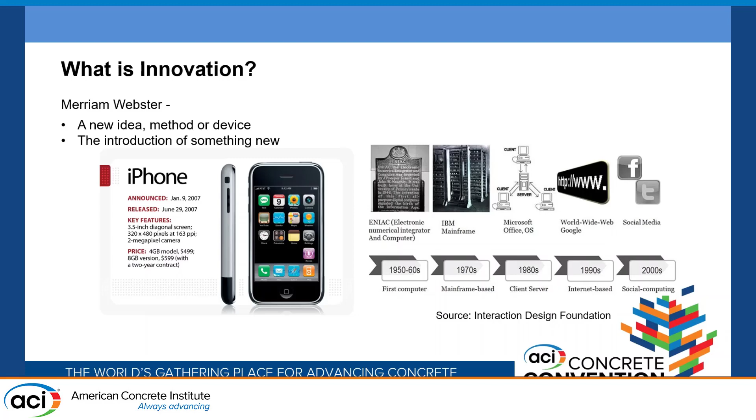We have these little block devices where you can do commercial business immediately, nothing related to iPhones. On the sustainable side, you have reusable bags that were developed to meet the need of changing from a plastic bag to something more sustainable.

Getting back a little into the devices, even myself, I have a smart pen that we use to write and become more sustainable instead of using a lot of paper. We use these electronic devices.

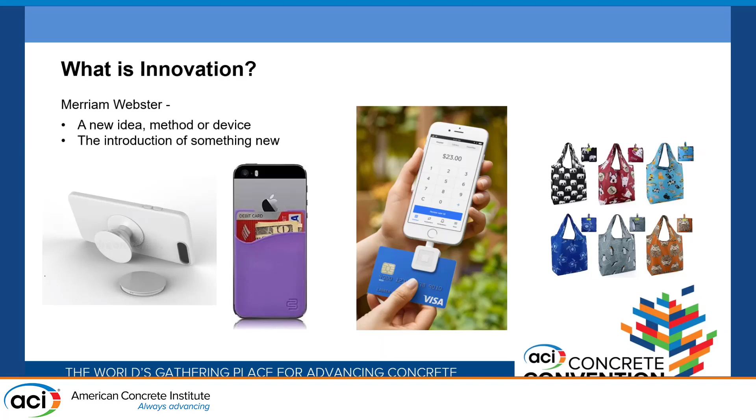However, in construction, the adaptation or acceptance of innovation is not as quick as we see in other areas. I'm showing here...

...the trajectory of the admixtures. In 1960, we saw the first superplasticizer that was developed. Then in the 80s, we saw the polycarboxylate coming to revolutionize the admixture area. We saw those used in Japan, as you see in the example over there. And then later in the 90s as well, we saw the first self-consolidating concretes being developed. So it takes a long time.

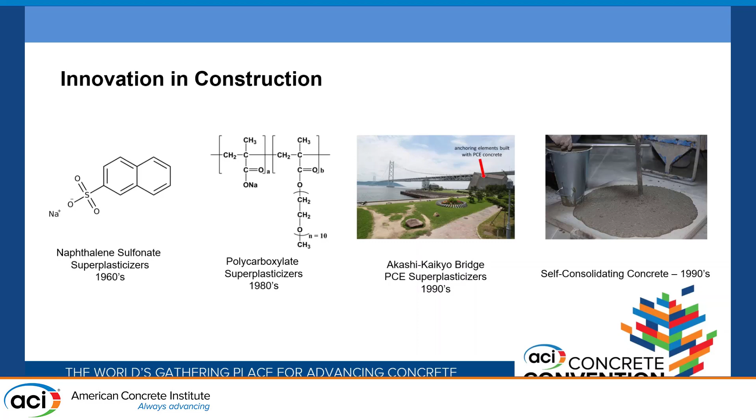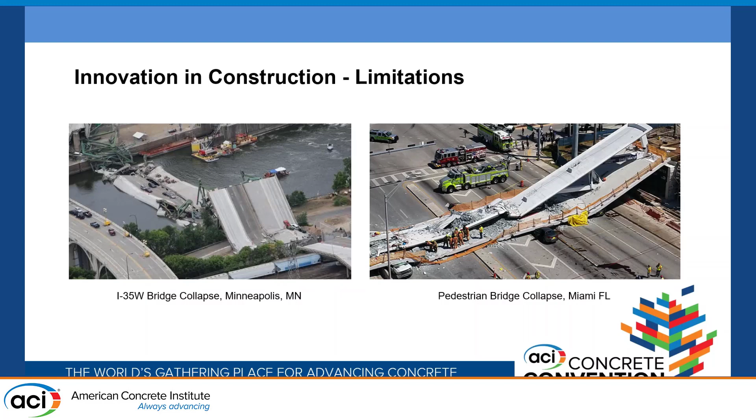Our industry takes a lot of time to accept new products, new innovations, something new. But there's a reason behind it. There's some limitations. We need to recognize that there have been some catastrophic situations that made us think, or be apprehensive of accepting something that is new.

The reason why is because if something is new, then there's no reference. People and engineers in our industry look for references. Nobody wants to be the guinea pig, nobody wants to be the first one to try. But at the same time, if you're not the first person to try, then there's no history. So it's like the chicken and the egg kind of story. But that's how it is.

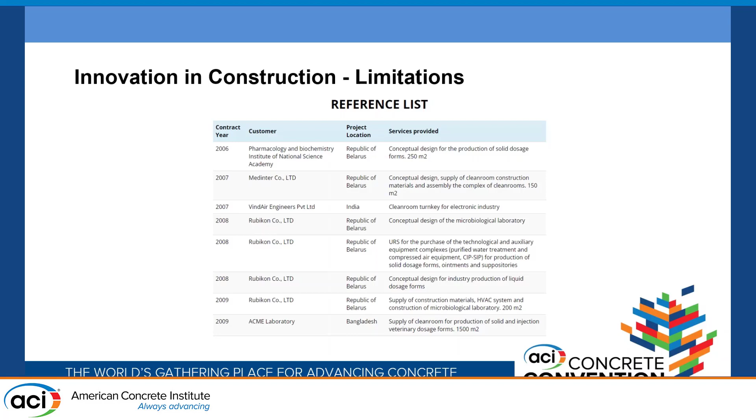And we have to continue to work on this situation and move the industry to a more innovative industry.

So in summary, the industry needs proven technology in order to move forward with something new. At the same time, these big organizations, such as the one I'm working with, also need the value proposition well defined, need to make sure that the return of investment is there, which brings limitation as well.

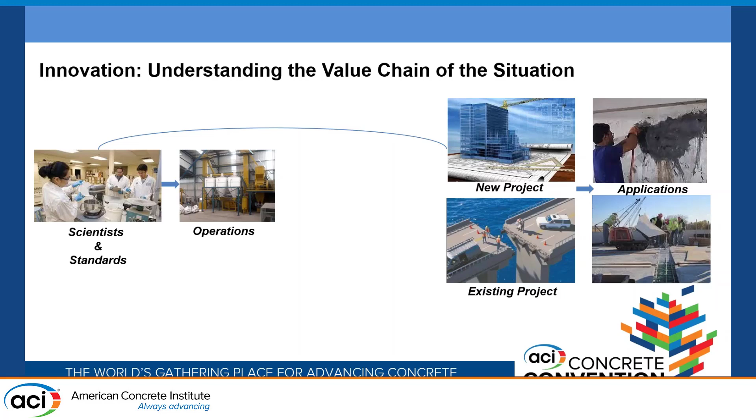Once we understand that, we also need to understand how the solution will be applied, right? That's important at the end of the day. When we do that, we come back to the lab. We met with experts, analyzed the standards, and decided what needs to be done in order to get into that specific solution. Then you need to make sure you can produce that new solution and supply it if it's something new. This is an iterative process that we follow in different cases, and we have to do that if we want to address certain topics or issues we face in the industry. We have to have an open dialogue with the different stakeholders to understand how we can bring new solutions into the market.

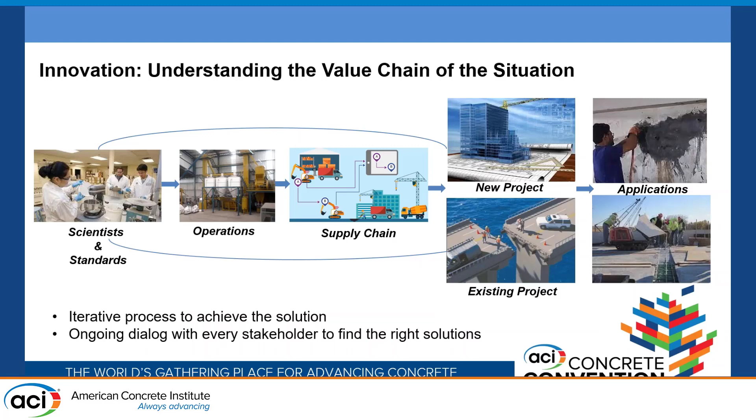This is my introduction to start talking about 3 specific projects that show this whole value chain out of the box, out of the specs of following a strict protocol, and being more flexible to find solutions in 3 different situations that we have here.

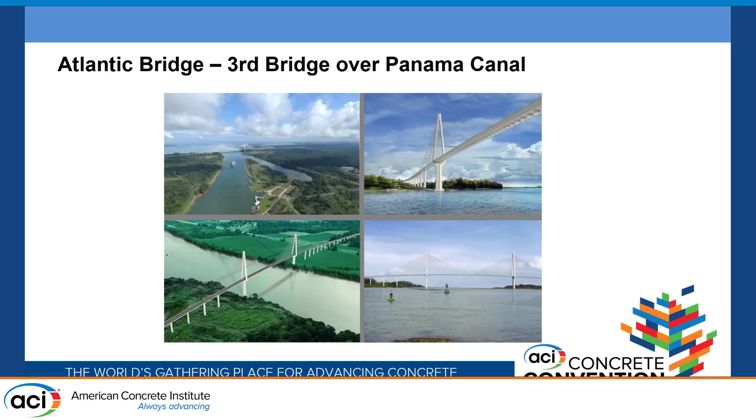The first 2 are going to be related to projects in Latin America. The first one is in Panama Canal. I'm going to talk about this gorgeous cable stay bridge that was awarded in 2012 in Panama to an international contractor. This bridge was almost $400 million of investment. It's the 3rd bridge over the Panama Canal. They're working on the 4th one right now.

The issue here is that this project was awarded to an international company that did a tender, understanding that they will not face any situation at the local level. They faced an issue with concrete. Workability was a big issue, and also the viscosity of concrete.

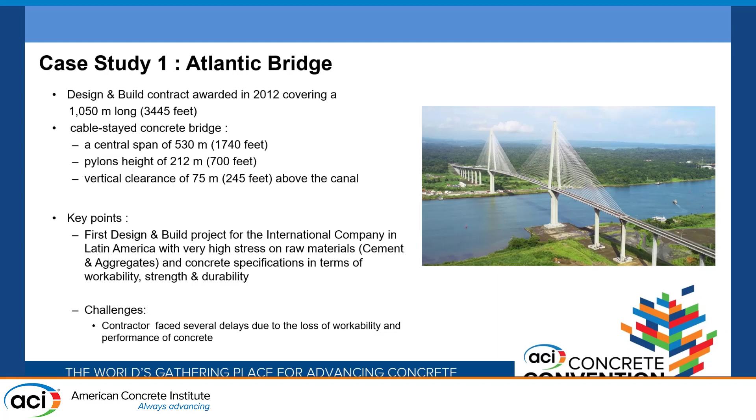These slides show a little bit of the history of what happened. In 2012, as I mentioned, the bridge was awarded to this design and build company, and they started working on the project. In Q4 2012, they started facing issues with the concrete. Guess what? They didn't know that the local materials were not meeting the standards, specifically because this is a European company that didn't have any experience in Panama before. So they struggled to pump the concrete, struggled to maintain the workability, and that's when they called us to be part of the equation and find a solution to overcome these challenges.

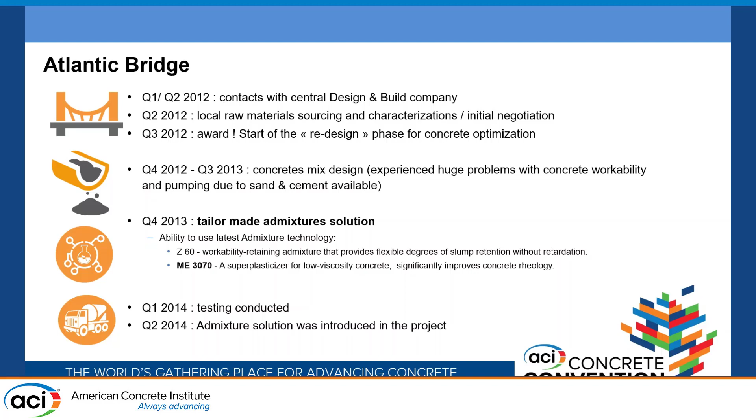The solution was developed, and I'll talk a little bit more about it, and introduced into the project at the end of 2013. So they really struggled with this situation.

Basically what happened is that everything started by the fact that the project required high durability. With that, the designer or the owner, which is the ACP, Autoridad del Canal de Panama, required that the RCPT numbers for the bridge meant all the concrete needed to meet below 1,000 coulombs. With that, a low water-to-cement ratio is needed, and in addition, the materials available were manufactured sand, very harsh sand, and they had to use supplementary cementitious materials such as silica fume, natural pozzolan, and others.

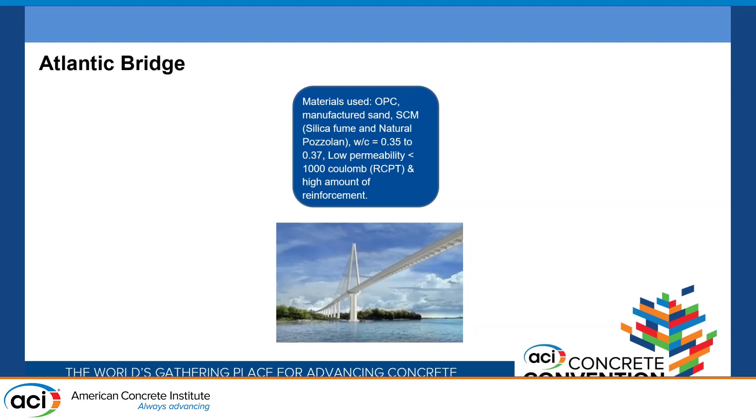So when the project started, they did not take into consideration the viscosity of concrete. They got the strength, they got the coulombs, they got what they needed, but guess what? They were having issues pumping the concrete.

They brought together several stakeholders to discuss what we can do. We need to address this. We were one of them. We came to the conclusion that we had to take a look at the viscosity. We took T50 as a test method for viscosity. Since we were on the project in Panama, nobody had a rheometer available, so in practice we used something that could be used on the project.

When the first reference design mix was measured, the viscosity in terms of time for T50 was 10 to 12 seconds. Among different stakeholders, the conclusion was that in order to mitigate this issue, we had to reduce the T50 to 7 seconds. So we worked on the mix design with the contractor, and we ultimately got a new solution that helped them decrease that viscosity and solve the problem.

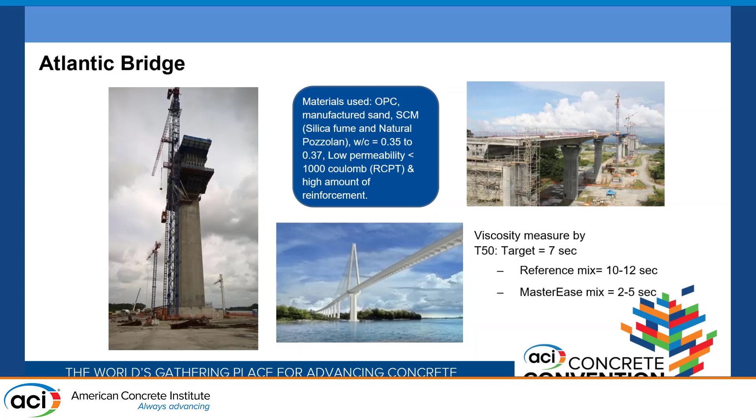The situation here is that, as I mentioned, when a design and build company, a multinational company, gets access to this type of project, they just follow what they used to follow in every generic big project. They look at the specifications, go to the tender, and once they get awarded, they work on the project. But they didn't realize they would face such issues with the concrete.

So what was key on this project was the fact that, at that time, we had a very structured project in Germany where we were developing a new molecule, but it was not ready to be launched. Fortunately, because we were working closely between US, Panama, and Europe, we decided we needed to do something. We needed to address this issue, and we carefully decided to take a risk and launch this product into Panama to see if it would help with the viscosity of the concrete and all the other requirements needed, and we succeeded.

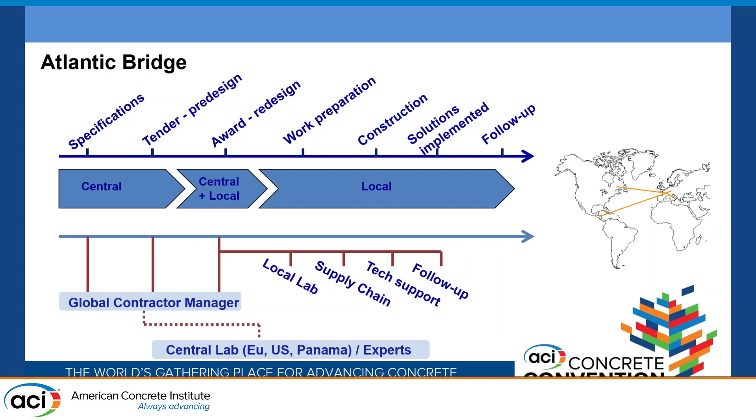It was a big push. We knew that we were not fully ready to do this, and there was a lot of logistics behind, but finally we were able to succeed.

And with these slides, I will close this case study to move to the next one. My message here is as follows: the key part to be successful in this particular project was that we look at the whole value chain. We look at what ACP, the Autoridad del Canal, wants, we look at what the contractor and engineers were facing, and we look also at the concrete. We addressed every single part of the whole value chain before we decided to take that new technology out and decrease the viscosity of concrete and solve this big issue.

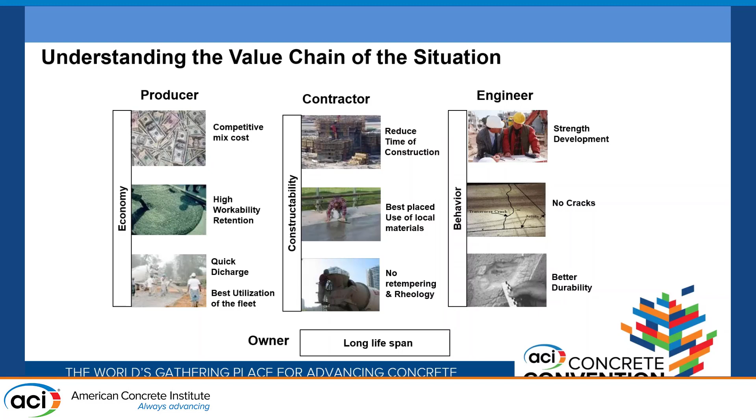Now I'm going to move to the second one. This is related to the underwater grouts, and I'm going to spend here more time than in the other one.

First of all, this is related to the rehabilitation of Ituango Dam. Ituango is the largest power station in Colombia, a 225 meter tall embankment dam. This project has 8 huge turbines to generate energy. The energy that this hydropower project generates is 17% of what Colombia needs in terms of energy.

So imagine that. The issue with this specific project is that they ran into delays that took them into the rainy season. As a background, in South America there's no 4 seasons like in the US or other parts of the world — there's 2 seasons, the dry season and the rainy season. So in this case, the project delay pushed them into the rainy season, and with that came the possibility of the project becoming completely compromised, because now you have more water than was considered during the schedule of the project.

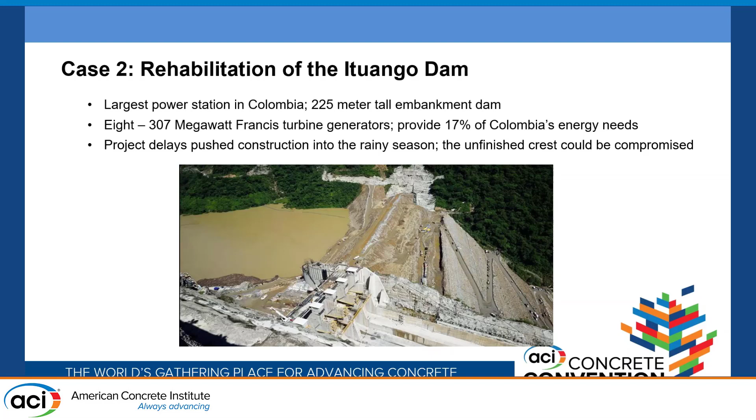So what happened here? We're in the rainy season. There was a high debris flow of water going through the main 3 diverting tunnels that, as in any dam, take the water out from the Cauca River to divert it from the river. Due to the rainy season being in the equation, one of the diverting tunnels was clogged with a lot of debris. If you look on the internet for this specific project, there was a lot of issues around it, but we're going to focus just on this one.

What happened is that with the diverting tunnel clogged, the water caused high pressure, and they had to wait a few days to decide what to do. They tried to unclog the tunnel. It didn't work. So they had to evacuate 9,000 people because of the situation. It was a whole crisis, because if they didn't solve this, more than 100,000 people would be affected.

So basically, under a lot of pressure, they had to divert the water through the unfinished powerhouse. You can imagine how big the loss of the turbines was — that's a different story, millions lost. This project was originally a $4 billion investment that ended up with additional cost. But they had to do it — they had to run the water through the powerhouse.

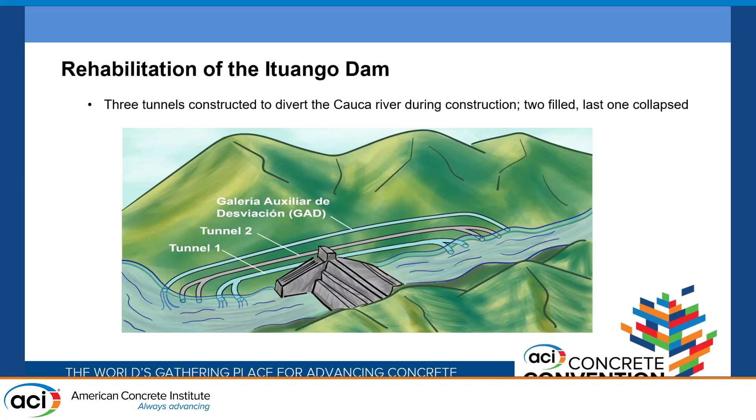They fixed that issue, fixed the pressure of the flowing water, and avoided any further catastrophe in the country. But at the end, they had to do something with the diverting tunnel. The designers and consultants met and decided they had to close one of the tunnels that collapsed and would no longer use it. This is a pictogram of how it looks.

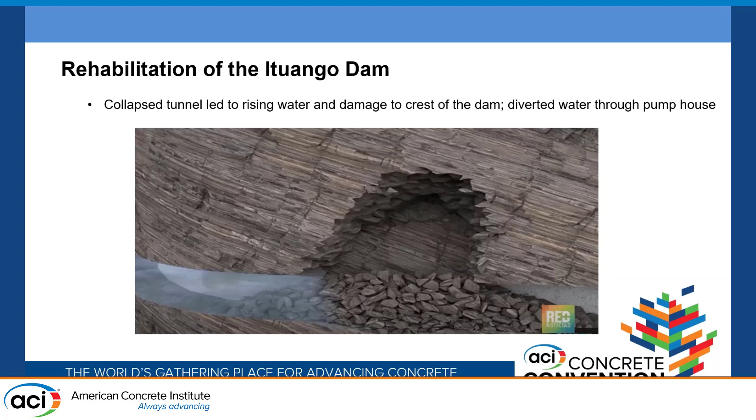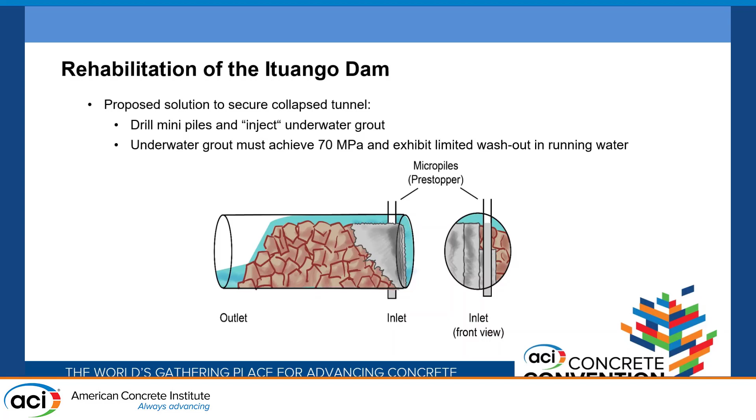The solution proposed was to create pre-stoppers in the tunnel and inject, generating some micropiles to inject underwater grout and also a resin material. You might think, why not do it with only resin? The issue is cost — when you have a cementitious material, it's more cost effective than filling everything with resin.

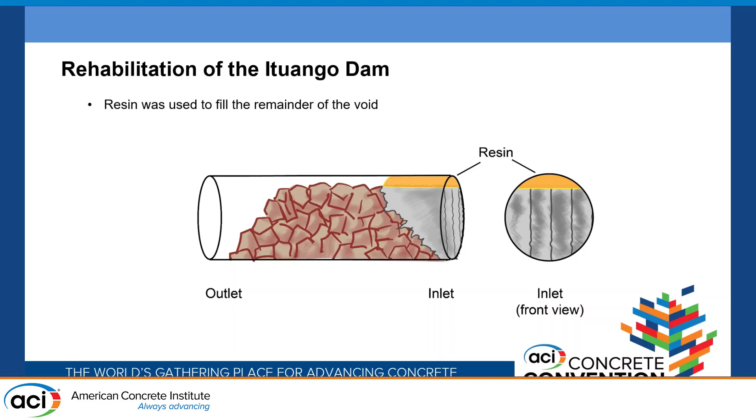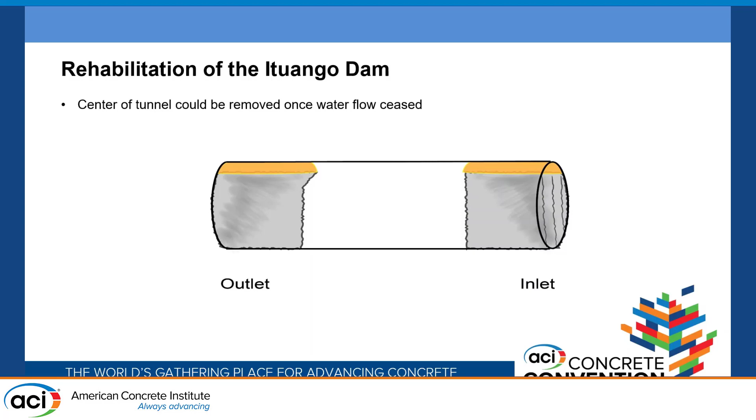These micropiles were injected, and this pictogram shows how the first pre-stopper was done, and at the end the resin was introduced to fill the remaining voids. Once the 2 pre-stoppers were done, they removed the excess material inside the tunnel, backfilled it, and closed it. They had to do this in order to stabilize the mountain, because there were also some issues with stabilization.

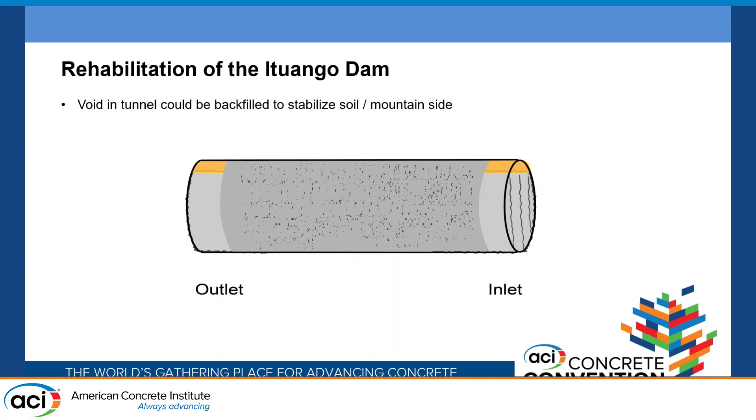So what did we do here? We had to quickly develop a new solution that was not in the market. We needed an underwater grout that was pumpable for more than 130 feet, with an open time of more than 1 hour. The strength requirements were clear: 48 megapascal at 28 and 56 days, as I showed before. In terms of anti-washout properties, they knew the tunnel already had water running, so the material had to withstand 340 liters per minute without losing more than 30% of the material.

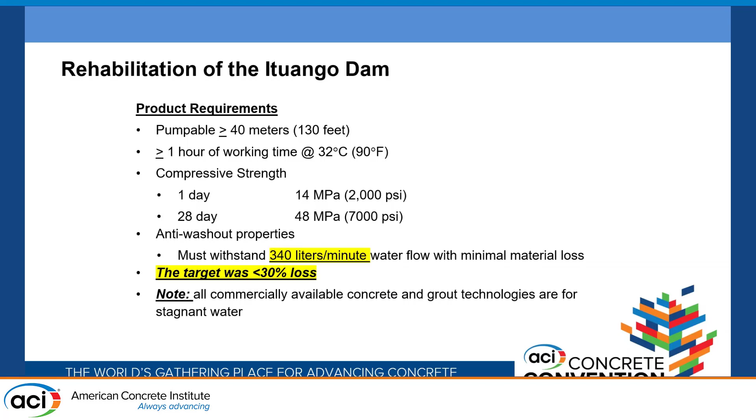So how do you prove that? We have several collaborations with the designer and the different stakeholders, the contractors, and so forth. And in order to simulate what was happening there, 130 feet away, we developed a fish tank as a mock-up. We did that in our facilities in the US, but also in Colombia.

So we were basically doing the iteration that I mentioned at the beginning. We did it three times in order to get to the right solution to incorporate this grout into solving this issue. What you see there is the fish tank that has an inlet and an outlet. At the outlet, we have a drum that collected the water that was exiting, and by measuring the density of the water, we evaluated how much material was lost.

It was not us only, it was a team of people. The designer was involved, the contractor, and several other consultants, and ourselves trying to figure out how to solve this situation. What you see in the middle is a picture of one of the prototypes that were conducted, and we basically saw that it looked good from the outside. It seemed that the product was injected correctly, but at the same time, we took several cores to analyze the consolidation of this material.

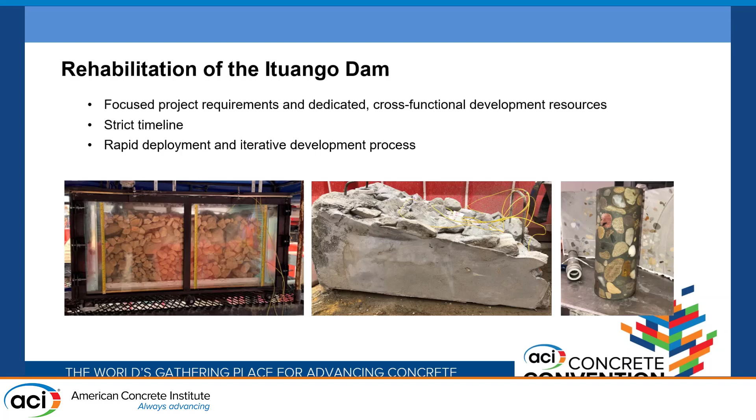So we ended up putting 1,200 metric tons of grout produced in the US and supplied to Colombia, stored in very controlled temperature containers in the middle of the jungle in Colombia at 90 plus degrees of temperature, and we were able to succeed on this. So it was obviously a lot of stress and a lot of people involved in creating this solution, but we were lucky. No, obviously we had a lot of success in doing this.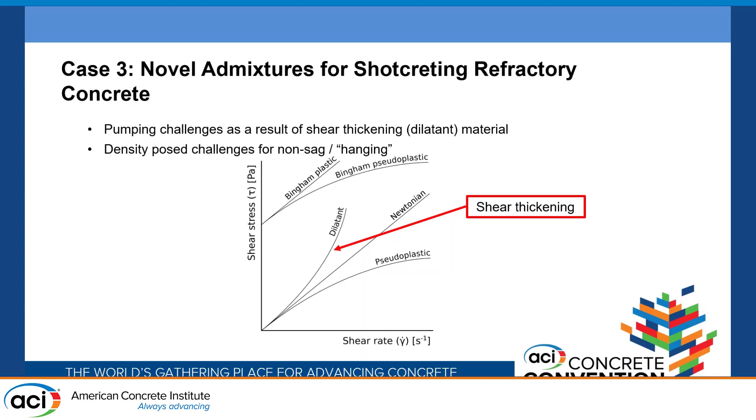The last case that I wanted to show is something that is not in Latin America. It was done basically in the US, maybe two or three decades ago. But we thought it was important to mention this as well. When refractories were something big, and shotcreting refractory concrete was something new, we didn't have the right solution available. We found out there were some pumping challenges with this material, as it's a dilatant material, and we also knew that in order to do shotcrete, it must be non-sagging.

So when we look at traditional solutions for shotcrete, we think about sodium silicate accelerators as a traditional accelerator, but that doesn't work in this type of solution. And the reason why is because we're talking about refractory. So those materials have very deleterious properties on this type of refractory concrete because they soften the properties of the material. And in addition to that, the typical superplasticizers were not able to overcome the dilatancy.

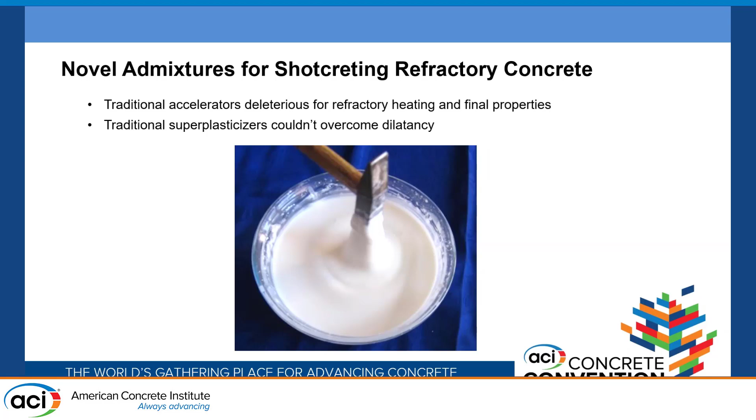So our team - I was not there, but I was part of the other two - my colleague Rick First was part of this specific one. He said that they met and started thinking and drafting a possible solution, and they ended up thinking about corn starch. They said, well, we use corn starch to increase the viscosity of soups. Then you end up talking about food and all of that. And finally they said, okay, we need a thickener that will hold the concrete. And that's what they did.

Instead of including a traditional accelerator, they introduced a thickener in the nozzle, being able to make the concrete hold in the wall. And in order to overcome the dilatant properties of the concrete, instead of using a superplasticizer, they foamed the concrete. In combination with the high compressed air, they were able to meet the requirements. And finally, when you look at refractory concrete, you will always find a thickener involved and air entrainment involved. This is the reasoning behind it.

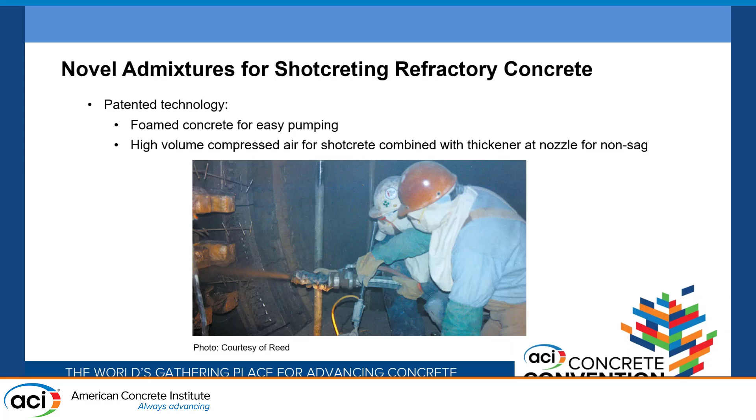This happened decades ago, as I mentioned, but we thought it was critical to mention that. We have done this before, we continue to do it, and as an industry, we need to take into consideration that our industry is slow to adapt to new innovation, and sometimes we need to face huge issues or requirements in order to accelerate the process. But I have shown here that if we take a look at the whole value chain, the whole scenario, and talk with all the stakeholders and assess the risk, we can definitely move forward with more innovation in our industry. So I invite you guys to continue to embrace innovation, and hopefully we can continue to move forward.